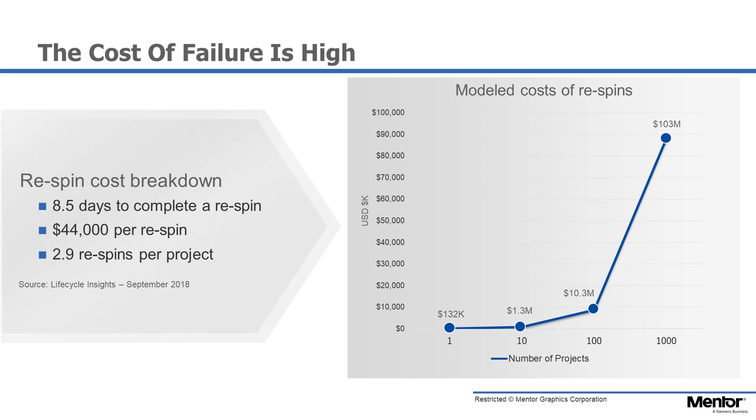This is cost and time that is currently baked into existing schedule projections because it's somewhat expected that designs will go through 2 to 3 respins. This is really unreasonable and unnecessary, and it only gets worse because with added product complexity come problems never seen before, increasing the potential for even more respins as teams hunt in the dark for the root cause of problems.

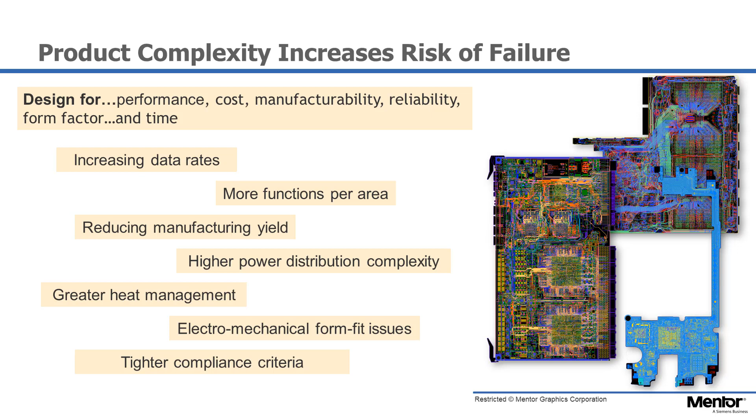Speaking of increased product complexity, the number of things the engineering team needs to design for, like performance, cost, time, and manufacturability, are a key challenge to consider, even forcing trade-offs between requirements in some cases. Some of these product complexities may look familiar to you. Increased signal speeds, function density, manufacturing yield, power and heat management, the list goes on. Any of these could be the cause of increased respins in your engineering team.

The first thing that typically happens when an engineering team faces a new challenge is that a domain specialist is brought in or trained to identify the problem. The specialist is then used as the reviewer of last resort before designs go to manufacturing. This is certainly a step in the right direction. Some problems will be found sooner. But from a process perspective, a bottleneck is created as multiple engineers submit their designs for review.

And because the design engineers don't have the same specialized domain training, their work is more likely to go through multiple virtual respins before the design is approved. This adds delay to the schedule, and in some cases still lets errors through, as stressed specialists try to keep up with the workload.

Speaking of virtual respins, there's an inherent cost in the form of process delays. This is also somewhat hidden in the average schedule projection. Cost can be represented in incremental development time, additional resources, or even lost time to market. The absence of a strategy to detect and resolve errors early in the development phase can have a major profitability impact. In this research from ResearchGate, in yellow you can see a traditional model showing the increasing cost of errors for system-level test as a design progresses.

The same holds true during design, where errors sent back from specialists create iterations that exponentially grow in cost as the length of time increases between when the problem was introduced and when it's found. And since upwards of 70% of a product's cost are committed early in design, design errors can have a significant impact on the end product cost. Errors need to be found as early as possible to mitigate risk.

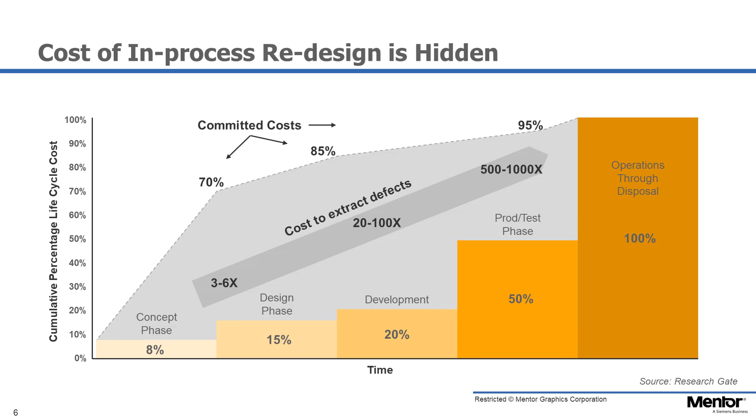I think I've made the point. 3 respins is not best practice. And with specialists focused on only a few critical issues, everything else is left to manual, time-consuming peer reviews that often miss errors. Fortunately, there's a better way. Here are a set of 3 interrelated best practices deployed by industry-leading engineering teams.

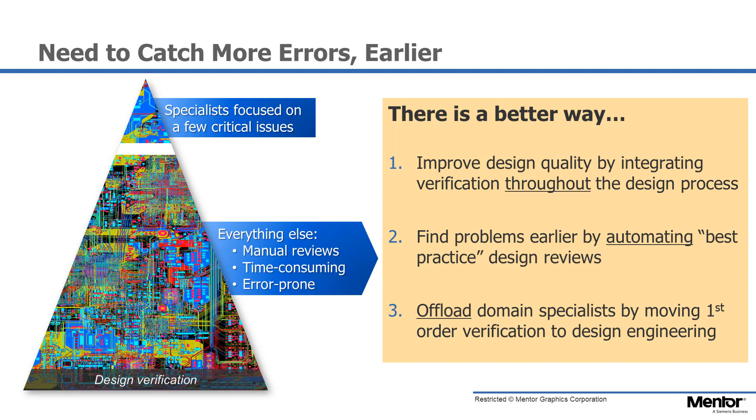First, verification, whether manual or automatic, should happen throughout the design process, not just at the end. Second, by automating design reviews, the coverage is higher and more problems are found sooner. And third, by doing automated verification throughout design by design authors, the specialists are out of the critical path and able to focus on more critical second-order problems. Let's take a bit deeper look at each of these best practices.

As I noted earlier, verification has slowly moved left in the design process. First, verification was done at manufacturing and test, shown at the right side of the traditional flow in blue. Then it moved earlier to sign-off and NPI. So it's only logical to continue that progression left by integrating verification throughout the design process. This is a true digitalization strategy, with verification accuracy improved through flow integration, creating a high-quality digital twin model.

In yellow, you see a sample of the types of verification that could and should be happening at each stage of the flow. Some you might expect, like AMS simulation associated with schematic design. Others, like DFT, have moved all the way from the end of the process to the beginning, where engineers make decisions that have a direct impact on testability.

The key here is to integrate verification at the stage where errors are introduced in the first place, so they can be found quickly and fixed by the design author directly working on that stage. In addition, because of the pervasive multidiscipline technologies that can be integrated within a design environment, trade-off analysis, for instance, power versus thermal considerations or performance versus manufacturability, can be undertaken early to enable product optimization.

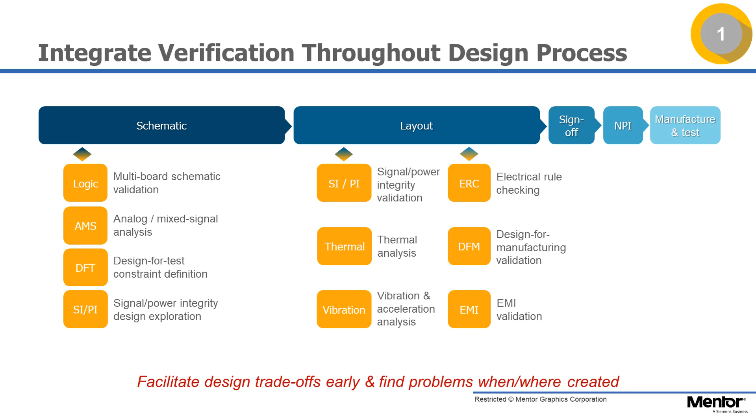The goal of this process is first pass or zero spin success of higher quality, lower cost products. I realize that this process looks more complex than the typical flow, but the addition of extra verification steps is directly offset by fewer spins and lower risk, often resulting in reduced design times.

The process on the left reflects a traditional approach where design teams review each other's work. As noted earlier, these are often manual, requiring a peer to quickly try to understand the design's intent and scan for possible errors. This process forces the primary engineer to stop working on the design, take their peers away from the designs they were working on, and spend lots of time in group meetings. And as you might expect in this inefficient process, they still miss things.

Automation of these reviews enables the primary engineer to perform reviews in real time as the design progresses, without distracting their peers. Automation also ensures that all engineers are using the same best practice process and delivers higher coverage than the manual peer review process.

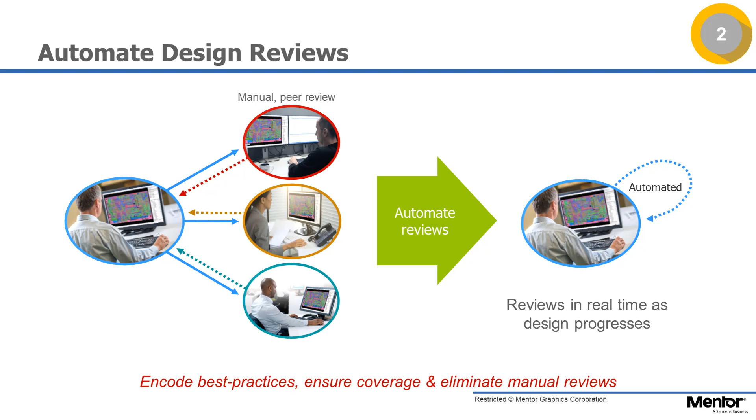This last stage really pulls the other two together. The specialist is utilized early on to define the processes for automated reviews. This might include tool and model setup, constraints to check, and types of checks to be run at each stage. There could be multiple specialists deployed in a process like this. For instance, ones for signal integrity, for thermomechanical, or manufacturability.

The engineering teams perform their own design reviews, then pass to the specialist who can focus on just the second-order critical problems the engineers can't fix, rather than focusing on reviewing the entire design. The net result is faster throughput of higher quality designs.

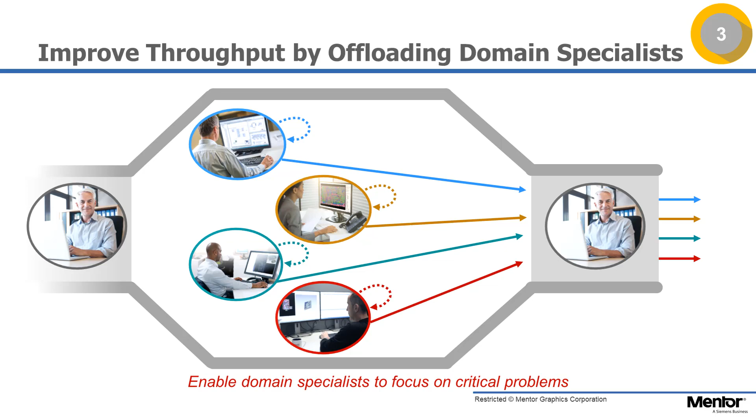An Aberdeen survey asked about processes for design verification. It classified the use of simulation by design engineers early in the design process as best in class for the following reasons. First, it enabled product innovation and optimization because physical prototypes were reduced 27% through the use of virtual prototypes and virtual testing. This allowed them to explore hundreds of design iterations, freeing them up to identify and focus on designs with the highest potential.

It also improved time to market. Best-in-class designers improved their length of development time by 29%, 6 times the rate of improvement by all others. Best-in-class organizations also met their time to market targets 76% of the time, a 17% higher rate than all others. It also reduced product costs. 71% of best-in-class designers met their product cost targets.

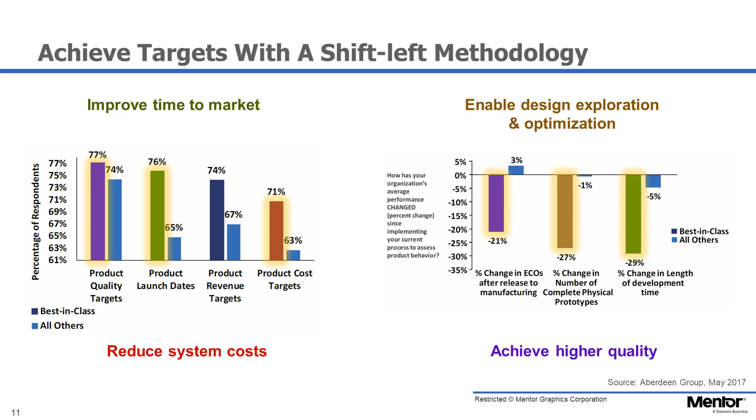And higher product quality was also achieved. 77% of best-in-class firms met their product quality targets. Plus, best-in-class products were more likely to work right the first time and less likely to require rework, as the best-in-class improved their ECOs after release to manufacturing by 21%.

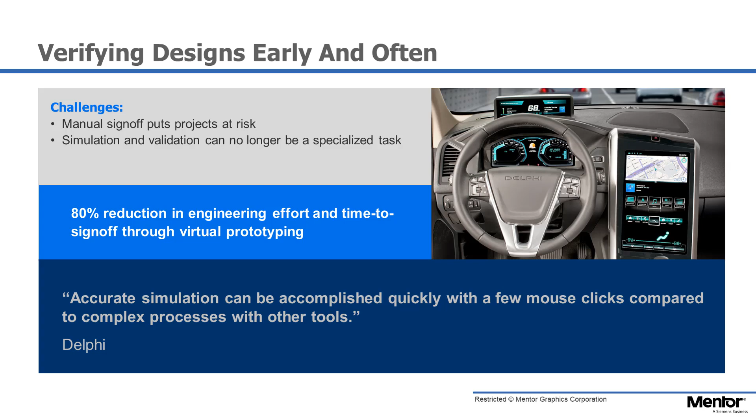I've got a couple examples of engineering teams that have adopted the best practice methodologies. Delphi is a great example of an organization that embraced the shift-left practice for signal and power integrity. By deploying validation tools early in the process, they enabled design engineers to run their own analysis, resulting in an 80% reduction in engineering effort and time to sign off. Keysight faced costly, latent design errors causing multiple respins. They've now deployed manufacturability verification technology within the layout process to accelerate design cycles and improve product quality.

Hopefully, I've made the point through multiple examples that a best practice validation strategy reduces time and cost and improves product reliability. Cost and time are saved by finding problems early in design, minimizing design iterations and manufacturing respins. Improved validation tool integration and ease of use enable non-specialists to run checks, reducing the specialist bottleneck. Tool automation eliminates the need for manual reviews and minimizes physical tests in the lab. Given the ability to evaluate alternatives, the cost of the overall system can be greatly reduced.

On the reliability side, 100% coverage of designs greatly reduces the chances of catastrophic errors slipping through the cracks. It also reduces the noise of false errors often introduced by the physical testing process itself. By enabling early analysis by non-specialists, the specialists are freed to focus on just the critical issues and also look for product optimizing alternatives. And finally, by optimizing the performance margins of a design through analysis, the rate of field failures will drop.